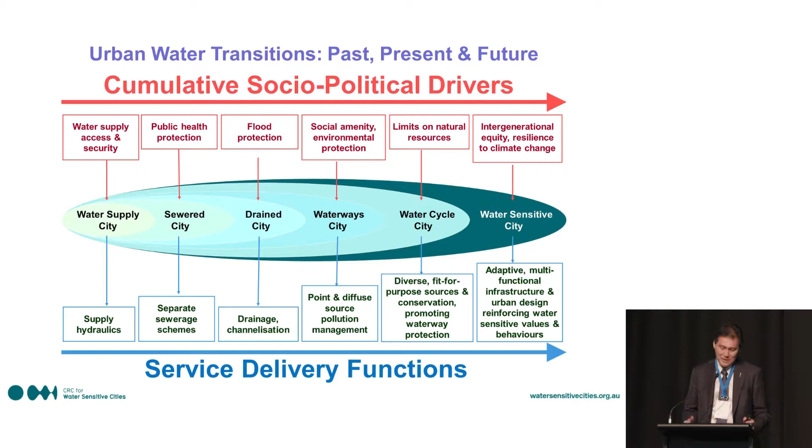And that was a continuum that helped us understand how cities evolve and how they could continue to evolve in the future as more and more challenges come through. But they're incredibly reactive. Our purpose was really to understand the historical transformation of cities and then ask the question, how do we use catalysts, events that occur in our city, to help us leapfrog some of those very linear transitions.

But if you look at the first three cities, most developed cities in the world, which most developing cities aspire to, you'll find that all their services infrastructure almost look the same because it is actually not context-specific. For instance, water supply: you find that often there's centralized water sourcing, some treatment, delivered to our city. Quite often the source of water is outside our city. And we have big pipes and big tanks to bring the water in to our city.

In a sewered city, nowadays in any developed and developing world, you go to your toilet in the morning, flush the toilet, and away it goes. And underneath that servicing is actually a whole network of sewage infrastructure that collects our sewage to a treatment plant, treats it, and we dispose of it. And in terms of a drained city, the signature of a drained city is every time it rains, water runs on the road, goes into the drain, goes into our nearby waterways, and away it goes. And in fact, almost every city you go to, this is the signature of the three evolutionary states.

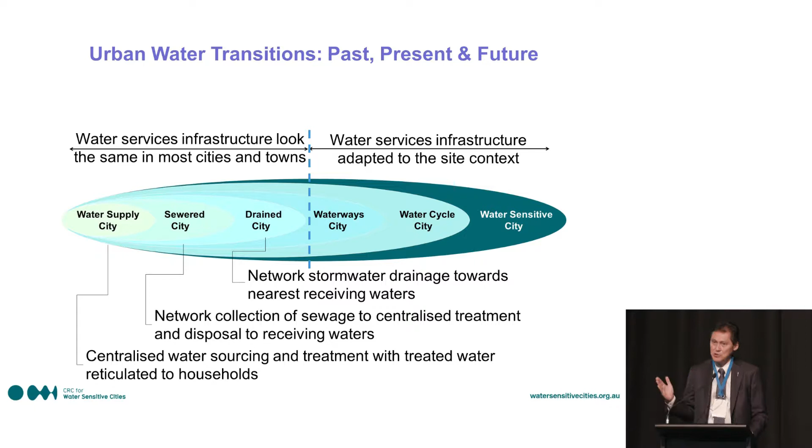But as we move into a waterway city, where we were beginning to see many cities starting to look to better quality of the environment, better livability, you find that, in fact, they are different. Because now, as cities grow and evolve to become, say, a waterway city, it actually is responding to the context of the site. And so the issues of waterway restoration, protection of our natural environment from stormwater pollution and wastewater pollution, are quite different. Because now it is responding to the hydrologic characteristics of that city. And they're different.

Before the commencement of the drought in Australia, many Australian cities were actually moving into that space whereby perhaps the affluence of the community, the awareness of the community for better quality of life and environmental quality, was pushing government to reform, to actually look at waterway management and look at how natural waterways are an integral part of city shaping. Then we had the drought.

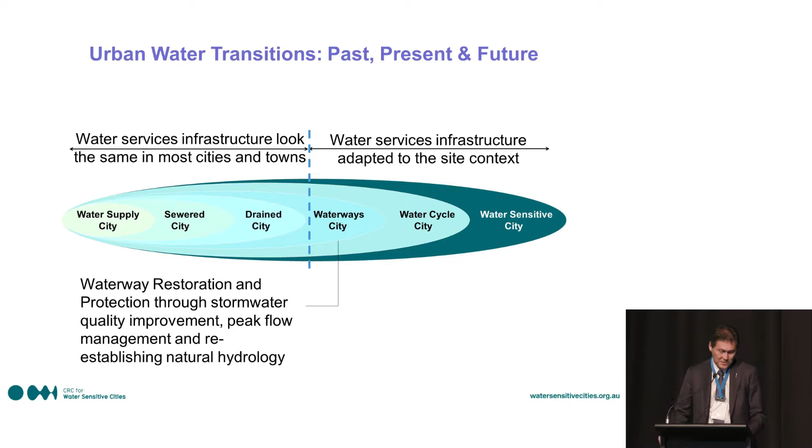And one of the things about the drought is that there were a lot of discussions in Australian cities and elsewhere, in California, for instance, as to how do we address water scarcity. There were initiatives that said we should think about integrated water supply, and the way I've captured it in this diagram is that perhaps we are actually moving back to a more confined, fundamental, less holistic way of looking at the way water is managed in a city.

Centralized wastewater recycling, direct potable reuse, indirect potable reuse, dual water supply reticulation, that really is an integrated water supply system. And there are some Australian cities that have transformed themselves to do that. But it's very technologically driven.

It is very much about water supply security in itself. There are some other cities in Australia that say, hey, we can think about integrated water supply by actually thinking about stormwater as a resource as well. Some cities that have gone that path have basically gone down it completely in isolation from the consideration of environmental quality and stormwater management for quality improvement.

Now, why I raise that point is that in New Zealand, what I hear, the Three Waters Strategy is in fact an incredible catalyst with political support to rethink how integrated water management can be delivered. The conversation could actually be about integrated water management for safer water supply, and to separate altogether the whole notion of freshwater agenda, freshwater reform, freshwater protection.

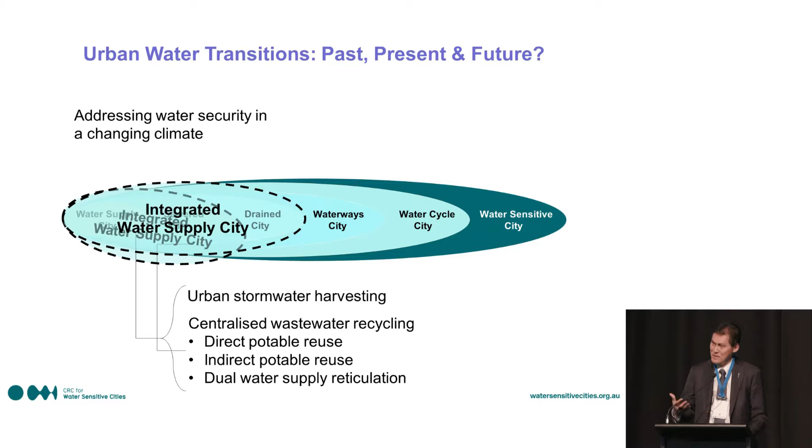Or you can start to think about using that opportunity, the political will, to marry together what total water cycle management really means. And perhaps even go one step further and say, what does that mean in terms of a water-sensitive city? What does that mean in terms of water sensitivity?

Whereby, again, in Australia, we are now saying that it's not only important to look at the servicing of the three waters in our city, we are looking at how that servicing improves the livability of our city through heat mitigation. Many Australian cities are now predicting incredible heat wave conditions, and the role of water management and water in the landscape really have a significant influence on the microclimate of our city.

Looking at the quality of bringing nature back into our city and ecological landscapes whereby, as we heard from yesterday's presentation, the use of biomimicry can actually introduce ecological function in your city, so that your city can in fact provide ecosystem services to both the built environment and the natural environment.

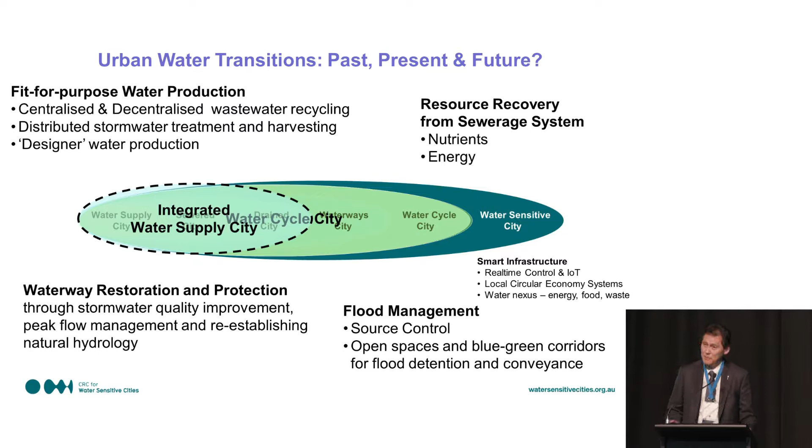Why the natural environment? It is about buffering the impact of urbanization, buffering the impact of human population on the natural environment. That buffering is significantly amplified by the fact that we have climate change, rising sea levels, and ecological transformation, whereby the natural rate of ecological transformation needs to be protected by buffering that very high variability and intensity of climate variability now being imposed on our built and natural environments.

That is really the concept of a water-sensitive city. It is progressively moving from the notion of water management for life, the basic essentials of good, safe drinking water, protection from floods, and environmental protection, to one that is water for livability.

Now, this is not new. It has been the thinking that's been developed, certainly in Australia and elsewhere in the world, but I'm really delighted to note that many parts of the world are embracing that concept. China has its sponge city concept. Singapore has its ABC Waters, active, beautiful, and clean water concept. In the United States, low-impact development is evolving into a much more water-sensitive concept.

Even the terminology of water-sensitive cities or water-sensitive urban design is now widely spread throughout the world because of its very holistic concept of looking at how water management in any context is sensitive to the challenges of the water environment in that context. That sensitivity is really about water resources, both in terms of our access to reliable, clean water and the protection of the water environment that we live in.

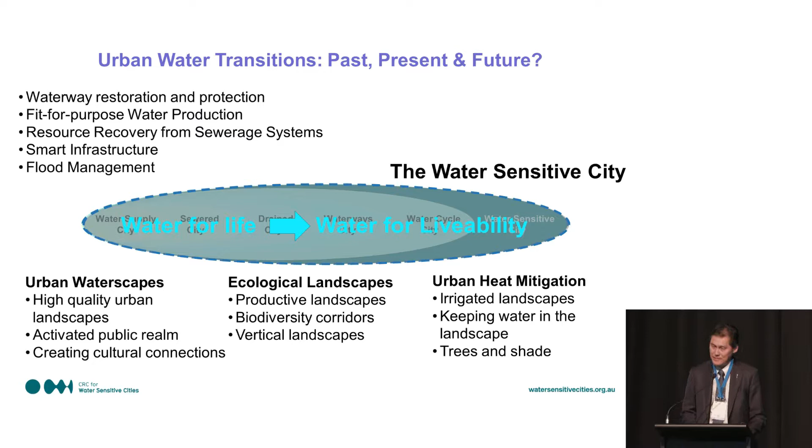In 2011, the National Water Commission in Australia started to ask the question about what is the urban water of the future. It really was a signal to the water sector, particularly the water utility in Australia, to really start to get them to rethink their remit, their organization, that their role is more than simply providing taps and toilets, the traditional role of the water utility. And so it was already trying to perhaps catalyze a new wave of reform in terms of how future water utilities ought to function.

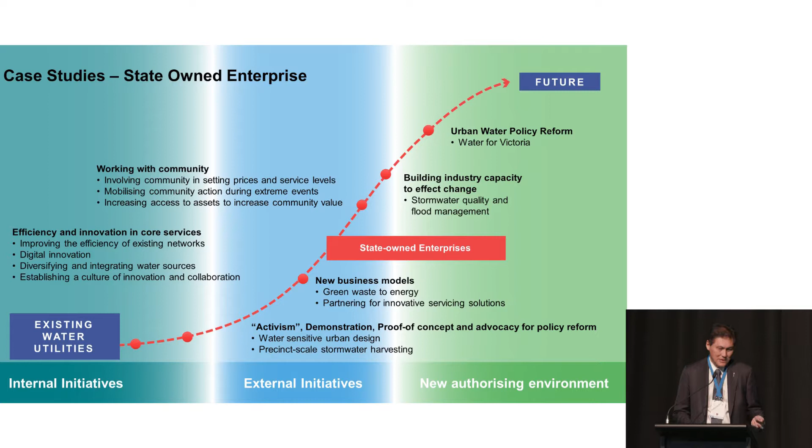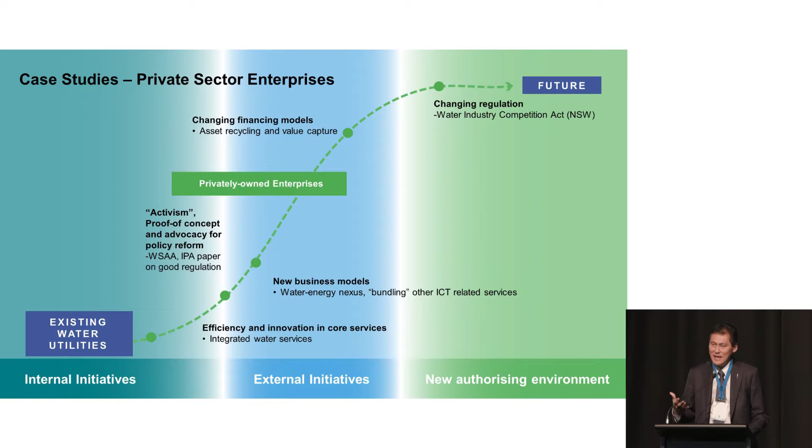I don't want to spend a lot of time on this, but there are a whole bunch of different case studies from state-owned enterprises, municipally owned enterprises, and private enterprise. They are simply case studies to demonstrate that these things can be done, and that bits and pieces of little initiatives can in fact be used to help the whole collective of the water industry transform itself as they come together.

So what do you want to be? The Three Waters Reform is a real catalyst for you to think about what the water sector in New Zealand could be. I put it to you that being an integrated water supply city is not enough, that you have the political will and the investment to start thinking about leapfrogging, to at least be a water cycle city. You need to think about what that means, and how you integrate safe water supply and water resources in terms of sewage management and stormwater management.

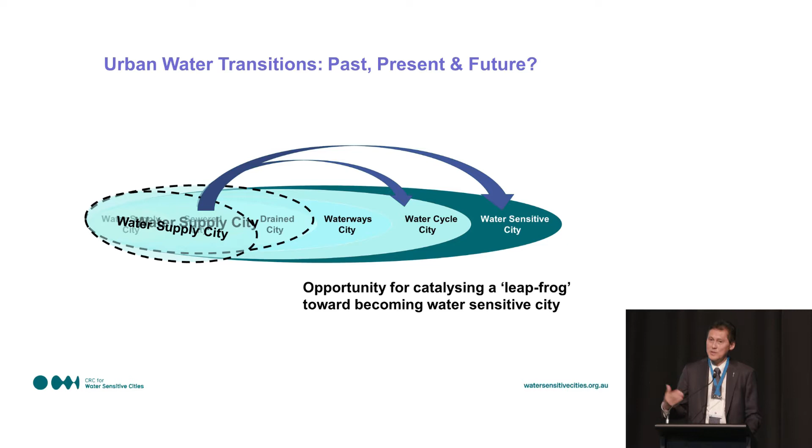As far as freshwater enhancement, as well as managing stormwater as a resource, come together for you to truly be a water cycle city. But can we be bold? Can we actually think about leapfrogging to a water sensitive city in the way you work with city planning and spatial planning, to introduce place-based solutions that deliver greater livability while strengthening your drinking water standards and integrated water management?

In Australia, we are also now looking for the next wave and the next catalyst for reform. We are couching it to think that for us to truly deliver a sustainable city, a resilient city in the face of climate change, it is not enough to just think about water. We want to look at how we can empower cities to be transformative. What we mean by being transformative is really given by this context.

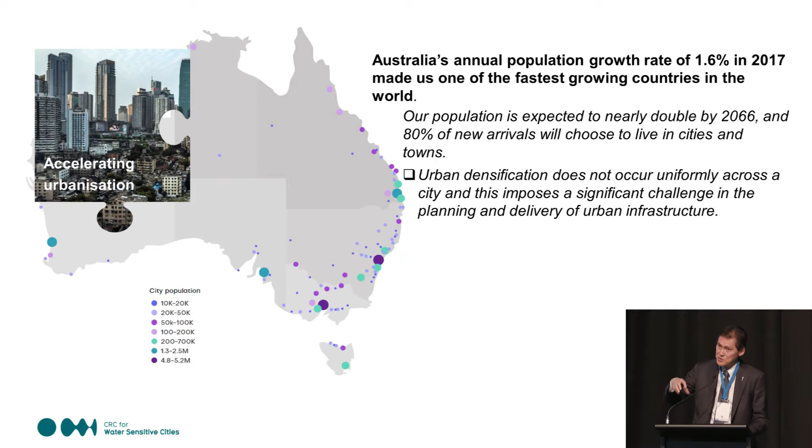Melbourne's population is expected to double in the next 15 to 20 years, and that doubling of density is going to be in isolated hotspots. How do we service that? How do we continue to maintain the operation of our existing infrastructure, but at the same time deliver the level of service in hotspots of high density throughout the city?

The problem is exacerbated by climate change, which amplifies the problems we have in terms of our resources, whether it's water scarcity or more frequent floods. Climate change and the uncertainty associated with it really requires us to rethink the way we operate our systems. Optimization is great, but it often has fundamental assumptions of the stationarity of climate, that is, the statistical properties of climate remain constant. Yet we know that the boundary conditions as a result of climate change have completely disrupted the concept of statistical relevance and stationarity. The 100-year drought or 100-year flood means absolutely nothing these days because of climate change.

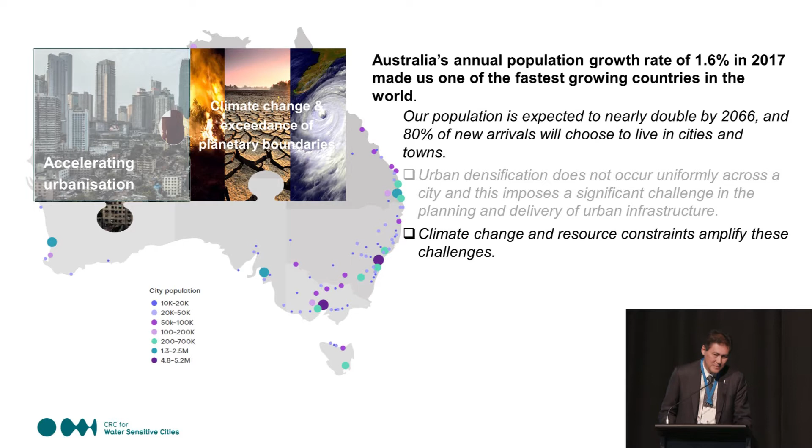How do you actually build resilience into the city, and how do you take the opportunity of investment as a result of population growth to redirect and realign city servicing strategies that accommodate that? The agility of the water sector is paramount in our ability to deliver more resilient cities. There's technological breakthrough, and the rate at which technological breakthroughs are occurring is at a pace whereby the way we think about water infrastructure needs to keep pace with it.

We cannot think of delivering water infrastructure on a 25-year, 50-year plan. We actually have to be a lot more nimble in our ability to harness emerging technology. And the concept of that aligns really well with the fact that urban intensifications are sporadic. They have their own phase of development, and we should really think about how we service each hotspot in isolation to best deliver the functionality of our existing infrastructure by looking at a different way of servicing. And I'll expand on that in a little while.

But there is also, in Australia anyway, a significant shift in community expectations. Enhanced livability is becoming a very strong community expectation. It is also almost viewed as a plausible trade-off between increasing density and increasing livability. If you can deliver better livability in the way you look at the sense of place, introducing natural systems back into your environment, the community might be more receptive to the concept of urban intensification as a means of funding that desired infrastructure.

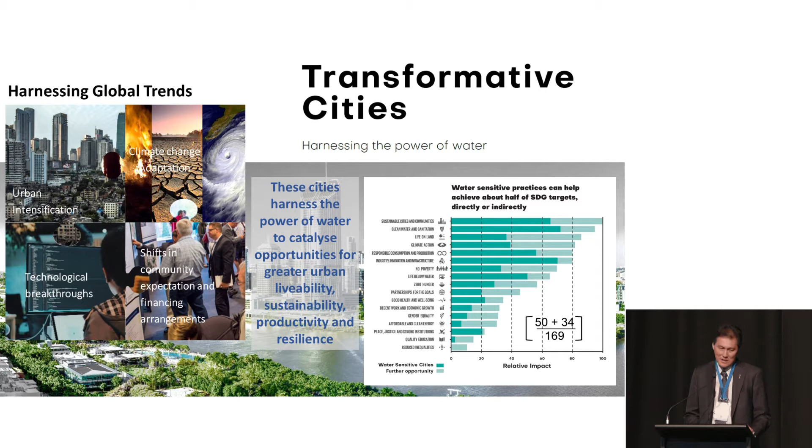I'll just finish off by saying, how do we think we can do that? How do we start sweating the assets that we have, but using the catalyst of new investments from population growth and urban intensification to redirect the trajectory of our cities into water-sensitive cities? There are three key things I want to talk about. The notion of hybrid solutions, that the solutions are now very much hybrid, multifunctional, multidimensional. The importance of digital technology and how that is going to enable the hybridization of our infrastructure to operate as one. And finally, the notion of circular economies, which we heard about, but I put it to you that the circular economy is very much linked to the way we look at spatial planning.

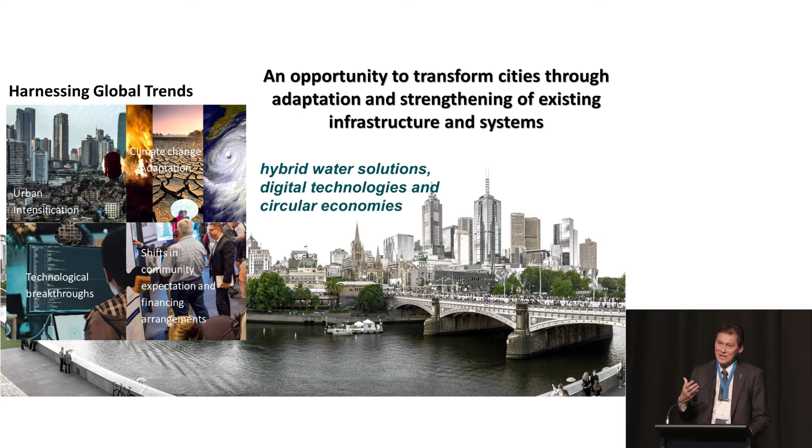I think I'll start with the notion that, in fact, our cities, and we need to recognize that our cities are social technical constructs. I don't know which one started first, whether the institutions that govern our infrastructure or the infrastructure itself, but they self-reinforce. Because of the evolution of our city in such a linear way in the past, you find that our institutions, the way we manage water, is incredibly fragmented because of the remit and the design requirements of our infrastructure as it evolves.

So you have the water supply department because water supply was the first remit of our city. Then we have our sewage department because sanitation was the next. And then even to this day, drainage is completely separate from water supply or sewage because, first of all, it is seen as a public good. There's no money in it. It's hard to raise money for it, and it gets carved off.

If you look at what's happening in the UK during the privatization era, what did they privatize? They privatized water supply and sewage. And what did they leave behind for government because it was a community good, as if it is not part of it? Drainage, flood management, waterways. And what do we now do? How do we unscramble that egg for those countries that have in fact privatized their water sector?

How do you actually deliver integrated water cycle management whereby 2 of the 3 water streams are now privatized and one is sitting with government still trying to figure out how they're going to provide the funding base for it? The opportunity of the 3-water scheme is also the opportunity to really think about how those 3 need to work together off a very similar funding base. So the technology itself is not going to solve the problem. Understanding the institutional capital and how you bring community with you as part of the social capital for delivering your 3 water strategies is just so important.

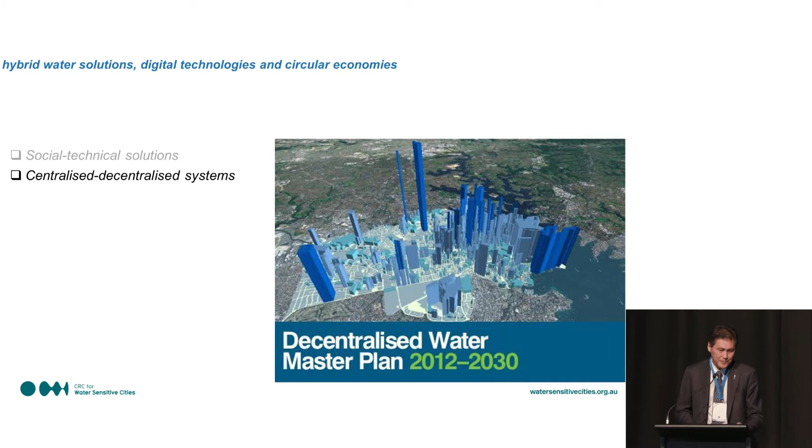Now, getting a decentralized system to operate with a centralized system requires some smarts. The digital technology, great sensors, are now enabling us to think about how the coupling can deliver much more efficient services that continue to operate the existing system with an increased demand at that local spot. I'll give an example, which I like to use in Melbourne because I know it well.

The Fisherman's Bend development is twice the size of the CBD, a conversion of industrial precincts into a high-value mixed-use precinct that will ultimately house something like 80,000 residents and another 80,000 or so transient people. The really rigorous analysis was undertaken by South East Water, the water servicing authority for this region, looking at whether we augment the water supply systems around us, Thomson Dam, another desalination plant, pipes coming in, or introduce local infrastructure into this place to create that hybrid solution from a water supply perspective.

And because Melbourne is at the bottom of the system, with a huge sewer running to a sewer pump that pumps it to our wastewater treatment plant, there was a great opportunity to think about sewer mining as a way of local recycling. At the same time, there was great opportunity to look at how local grey water mining can also be used to increase the level of water recycling in a very small loop within this precinct, creating a buffer to the demands of the centralized water supply infrastructure.

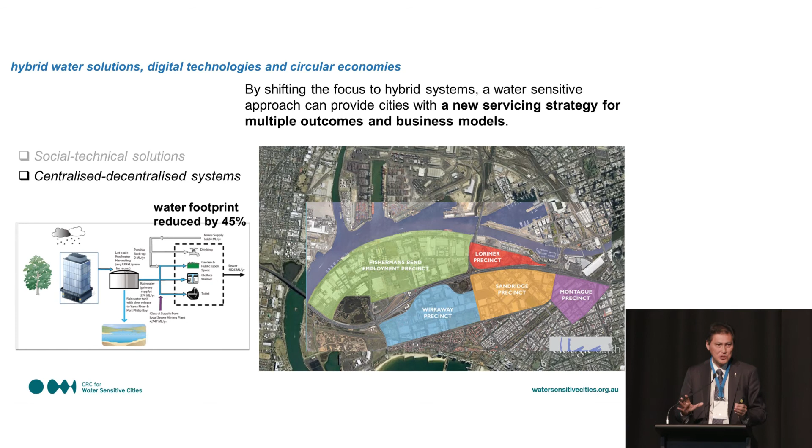Another example of hybridization is, of course, the green and gray infrastructure. Again, I use this case study whereby this is an industrial precinct with some existing stormwater drainage pipes. Because it's an industrial precinct, its level of serviceability is quite low. It's a 1 in 5 year frequency of inundation on the road and so on. But as it's being lifted to become a mixed-use, high-value residential estate, the design standard needs to be increased, whereby drainage functionality needs to ensure that no streets are being flooded up to 1 in 20 years.

The normal way we approach this is to rip all the pipes out, put in some bigger new pipes, and so on. But by introducing green infrastructure as an overlay to buffer that system, we found that the existing infrastructure can deliver the new level of service, a 1 in 20 year, by buffering. And by that, we were able to demonstrate that there was, in fact, a 25% reduction in infrastructure augmentation from what it could be.

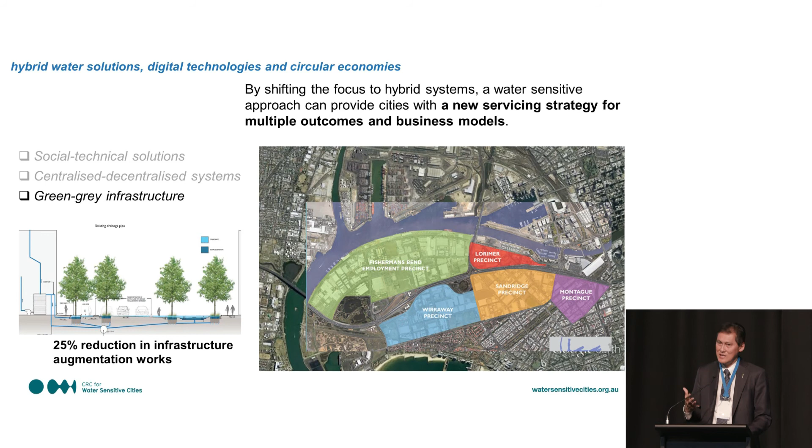How do you go about doing this? Because when you start to integrate water servicing, drainage management, and livability together, you really need to think about what the new institutions and new governance would look like. So vertical government integration and community co-design are fundamental to this.

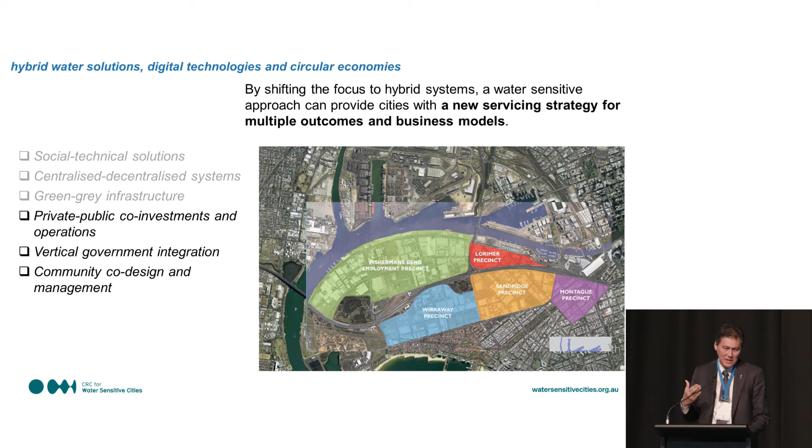So I'd like to summarize by saying that hybrid solutions, in fact, provide us with a way of really creating a new trajectory for our cities to support urban consolidation, which is the way urban intensification is happening at the moment, avoid or defer major trunk infrastructure, embrace opportunities provided by emerging technology, and provide opportunity, because of it being piecewise, for greater public-private investment, co-investments. And really, in our thinking, it is fundamental to delivering a whole-of-government strategy for our cities.

Now, with the time I have, I know that I've run out of time. I just want to make 2 comments. One is about the circular economy. Really important. We've heard about it. We heard about the opportunity of how perhaps, again, the water sector can provide some leadership in this whole area of circular economy. But I put it to you that the circular economy is best delivered if we actually think of it from an industrial ecology perspective.

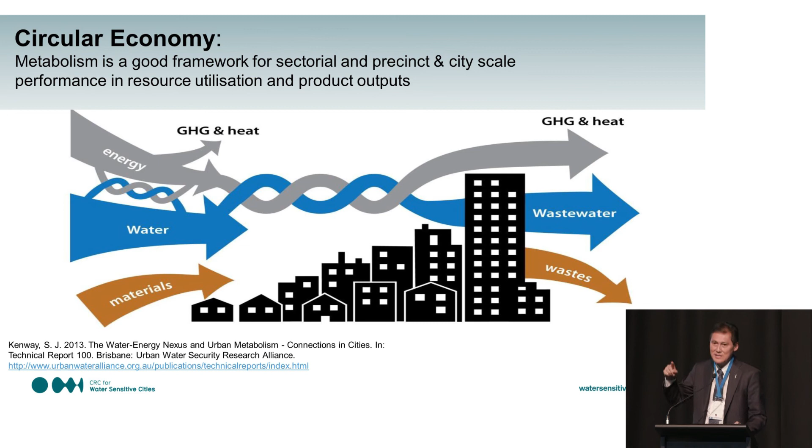And that is, because urban intensification is piecewise, we actually need to think about how urban planning, spatial planning, can actually cluster water demands and water uses together, such that there are little loops within a city. A circular economy in a city is actually about little loops within a city rather than one big loop for the whole city. I've got a whole bunch of other things I want to talk about, but I think I've run out of time.

And what do we do then in terms of the role of the water energy nexus? How do we look at water and energy recovery and use within those little loops? And what about nutrients? How do we actually think about delivering the type of urban agriculture and so on within that? A lot to talk about.